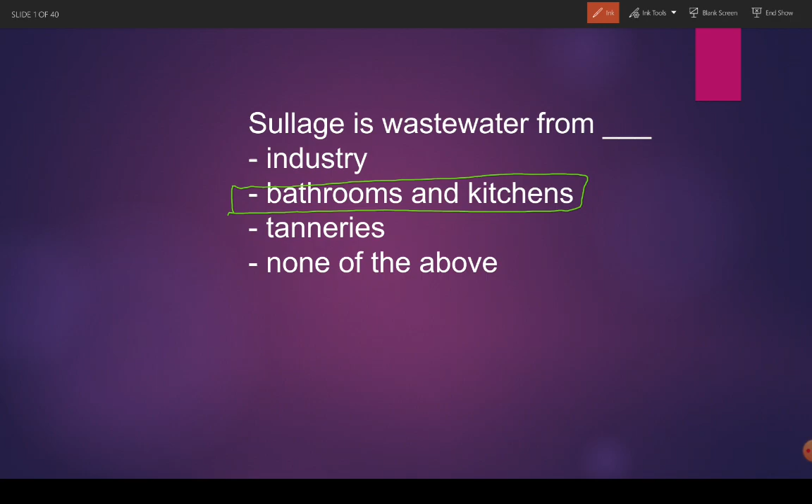Whenever we are referring to the specific word sullage, we are looking at wastewater from bathroom and kitchen basin. Wastewater from bathroom and kitchen basin is called sullage. Therefore the answer for the first question is: sullage is wastewater from bathrooms and kitchen. All right, now let's go to the next question.

Fill in the blank: blank has least moisture content. Garbage, sludge, rubbish, and sewage. Here we will first eliminate the terms having maximum moisture content. Sewage has maximum moisture content, so let's erase this. Then sludge; sludge contains water or moisture content. Now we are at garbage and rubbish.

Garbage contains organic, inorganic, and putrescible waste that can undergo decomposition. But rubbish contains mostly cardboard, paper, sheets, and mostly combustible items. And mostly combustible items means their moisture content is very less. Rubbish refers to mostly combustible items, which is why it has least moisture content.

Garbage may contain vegetables and leftovers, so the moisture content of garbage is more than that of rubbish. The correct answer here is rubbish. Rubbish has least moisture content.

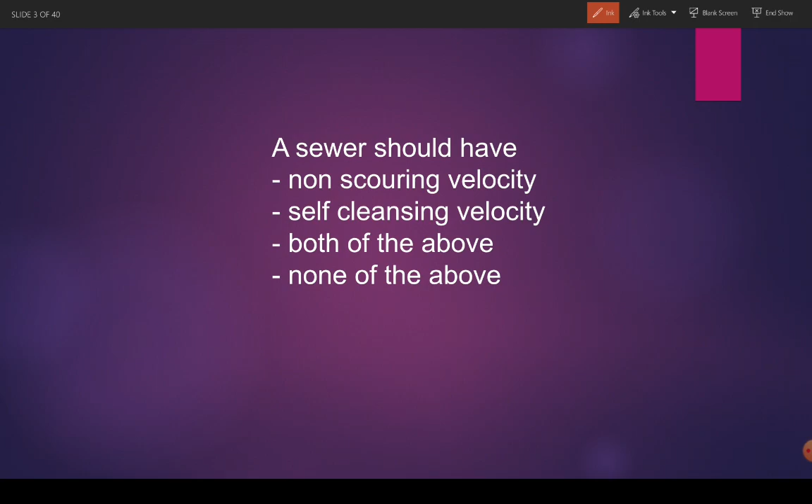Then, a sewer should have what: non-scouring velocity, self-cleansing velocity, both, or none? Whenever we talk about a sewer, it should generate a velocity that takes care of the obstacles formed by lodging of waste in it. Let's say a sewer is here, and some waste is getting deposited; then the velocity of incoming wastewater should be maintained such that all the deposited waste goes away.

This minimum velocity should be generated in the sewer, and this minimum velocity is called self-cleansing velocity. Now the velocity should not get so high that it scours or erodes the surface of the sewer. This maximum limit of velocity inside a sewer is called non-scouring velocity.

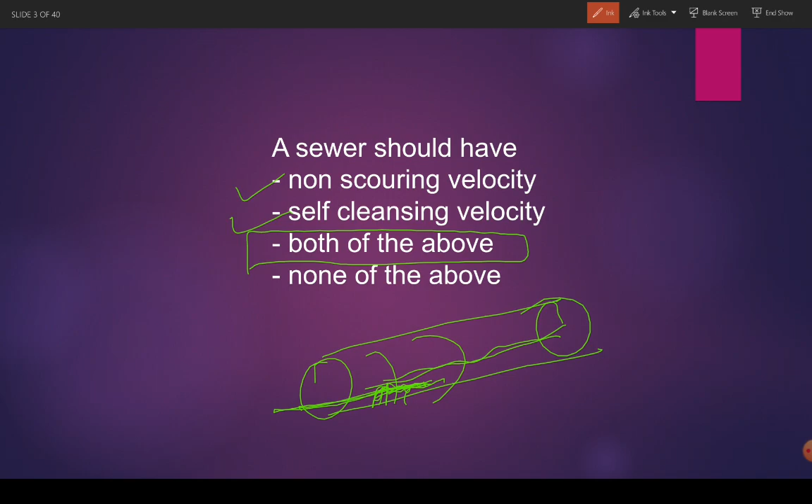Therefore the velocity inside a sewer should be such that it will not scour or cause erosion of the sewer, while also taking care of the cleansing function. That's why a sewer should have both self-cleansing velocity as well as non-scouring velocity.

Let's go to the next question: for combined system of sewerage, blank shaped sewers are best. Which shape of sewer is best suited for combined system? Egg-shaped sewers are best suited for combined system. The answer is egg shape.

Although egg-shaped sewers are difficult to construct and maintain, in a combined system of sewerage the sewer carries storm water as well as dry weather flow together. There is no separate sewer for dry weather flow and for storm water. Only one egg-shaped sewer takes care of storm water and dry weather flow, and it is very capable of generating a

self-cleansing velocity. In case of dry weather flow, the problem is that no self-cleansing velocity is generated in a large diameter sewer, but here the specific shape of this sewer makes it able to generate self-cleansing velocity. That's why for combined system of sewerage we use egg-shaped sewers. Now let's go to the next question.

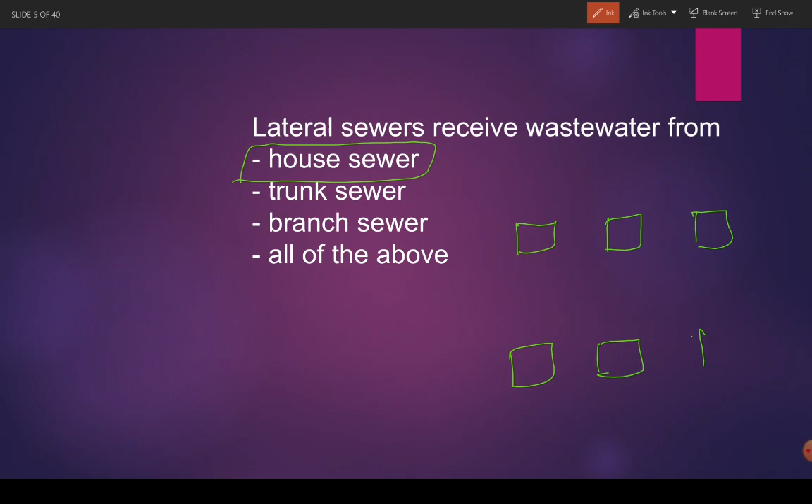Lateral sewer receives wastewater from the house sewer. For example, a number of houses are there, 1, 2, 3, and again 1, 2, 3 on two sides of the road, and this is going to be the lateral sewer.

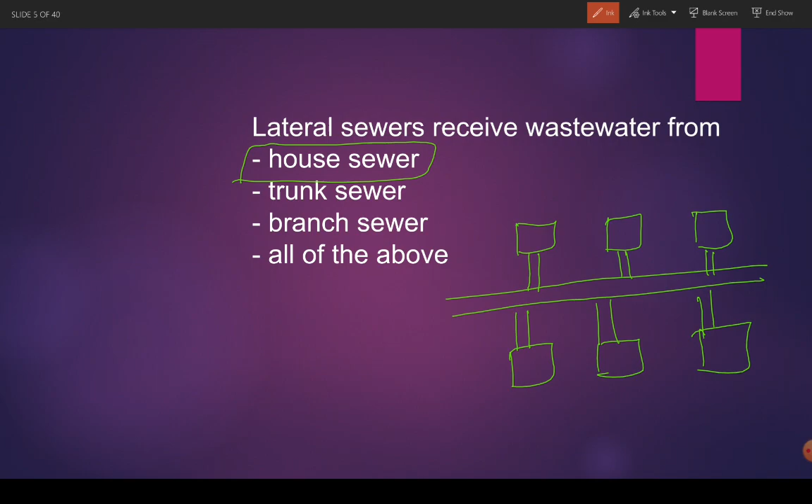Okay, and this lateral sewer receives wastewater from house sewers, from independent houses. Okay, one sewer from each house. All these house sewers dispose or discharge their wastewater into what? Lateral sewer.

Okay, let's go to the next question, which is saying: in a sewer network, blank is used that collects grit and sand from wastewater. Okay, whose function is that? Is it manhole? Is it catch pit? Is it clean out or fall? See, a manhole is there when we want to change the direction of the sewer and for inspection, cleaning and maintenance of the sewer.

Then catch pit is there. Catch pit does what? Catch pit collects all the grit and sand from wastewater and prevents their entry into the sewer. Okay. Now what is clean out? Clean out is nothing but a flushing system that generates a cleansing velocity and then dislodges all the waste that has been collected in a sewer. Okay, fall is there in order to maintain the specified slope of the sewer. In case some abrupt level change is there, we are going to use fall.

Okay, therefore the answer is: in a sewer network, catch pit is used that collects grit and sand from wastewater. The name itself is suggestive that it collects or catches grit and sand from wastewater.

Alright, let's go to the next question, which is saying: color of fresh sewage is. See, when we are talking about the color of fresh sewage, mostly it is grayish. Okay, and when we say the color will be dark brown or black or, let's say, chocolatey, these kinds of coloration will be there when the sewage gets stale. With passage of time, the grayish color is going to convert into shades of black. But remember, color of fresh sewage is grayish.

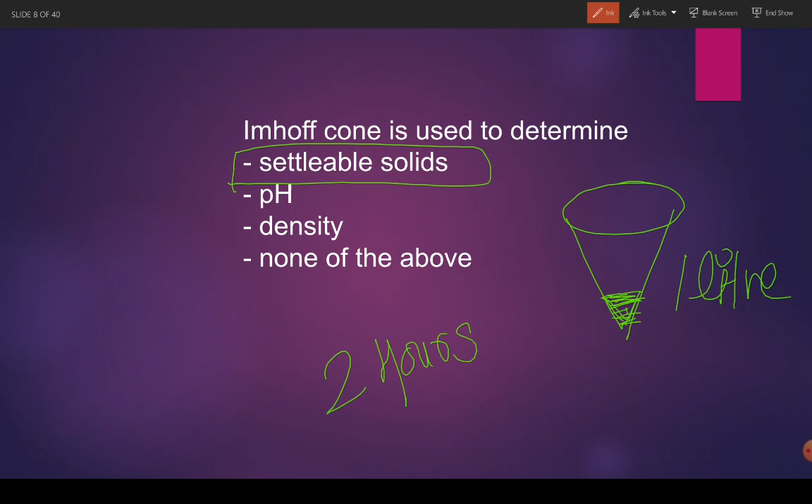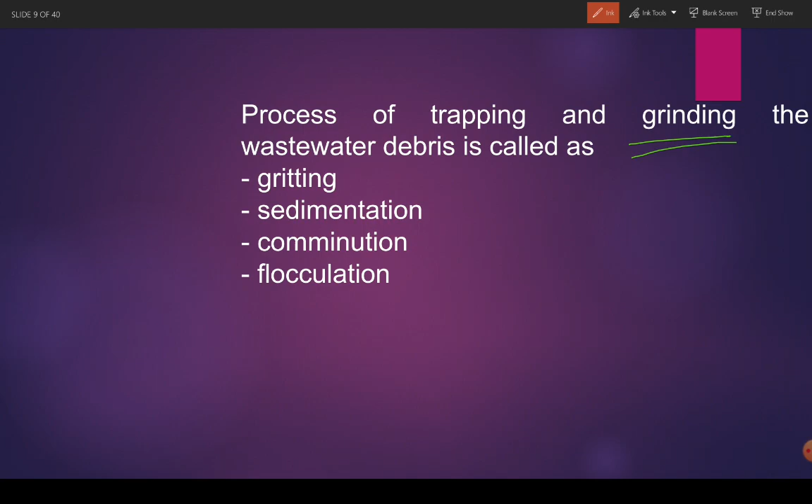What the comminution process is all about: it traps and then shreds all the organic or inorganic matter present in the wastewater into small size particles, so that they get collected, settled or stabilized in the further units of wastewater treatment. Okay, the comminution process makes use of macerators, comminutors, and barminutors. There are three devices in the comminution process: macerator, comminutor, and barminutor. Okay, the answer here is comminution.

Then, which of the following processes is an additive process in wastewater treatment? See, there are two kinds of processes in wastewater treatment. Either it is additive or it is subtractive. Whenever we talk about biological process, a biological process is a subtractive process, because whatever organics are involved in wastewater treatment, they are split and converted into simpler constituents which we can get rid of easily. This is done in biological processes only.

And when we are saying that a process is additive, the process is chemical process. Okay, because in order to make the wastewater content settle down, or in order to stabilize the wastewater content, whatever content we want to get rid of, we have to add a chemical that either results into some added mineral or some added compound into the wastewater, or some precipitate is generated that we need to take care of later.

Therefore, when we are talking about biological process, the biological process is taking away some content from the wastewater, and when we are talking about chemical process, the process is adding some new compound, some new component into that wastewater. Okay, that's why when we are saying a process is additive, we have to look at which process? Chemical process. Okay, because we are adding chemical for the treatment purpose.

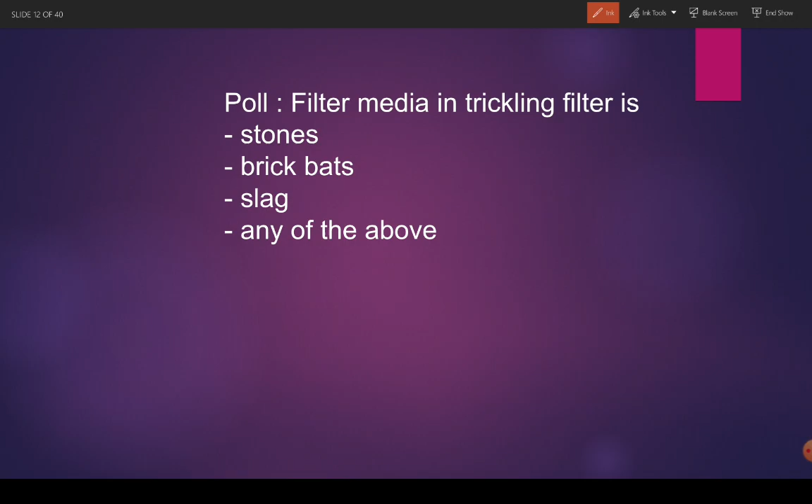Okay, then filter media in trickling filter is... okay, the word is wrong here. The question is, filter media in trickling filter is, it can be stone, yes. Can it be brick bats? Yes. Can it be slag? Yes. See, we need to have a stable, solid, hard and porous media when we are aiming to place it in any trickling filter. That's why the answer will be any of the above.

Okay, then activated sludge process is nothing but a large aeration tank, sedimentation or screening tank. See, activated sludge process means we are going to put activated culture of microorganisms in a tank where we will be receiving wastewater from primary settling tank. It will be thoroughly getting mixed up with the active microbial culture, and for the sustenance, maintenance and nourishment of the bacteria inside that tank, we will be providing them oxygen.

Okay, and oxygen provision is nothing but aeration. Here the microbes will be receiving food from the wastewater. Whatever the organic content is there, the microorganisms will be thriving on that organic content, and for their sustenance, for their existence, we will be providing oxygen via aeration process. That's why we can easily say that activated sludge process is nothing but a large aeration tank.

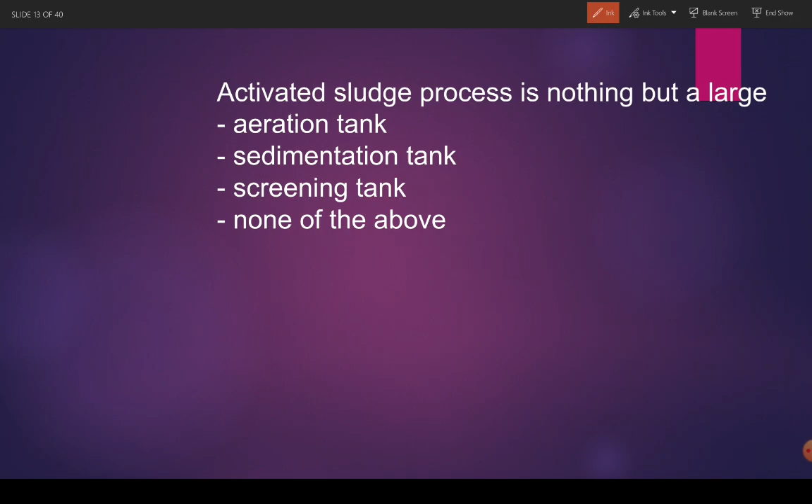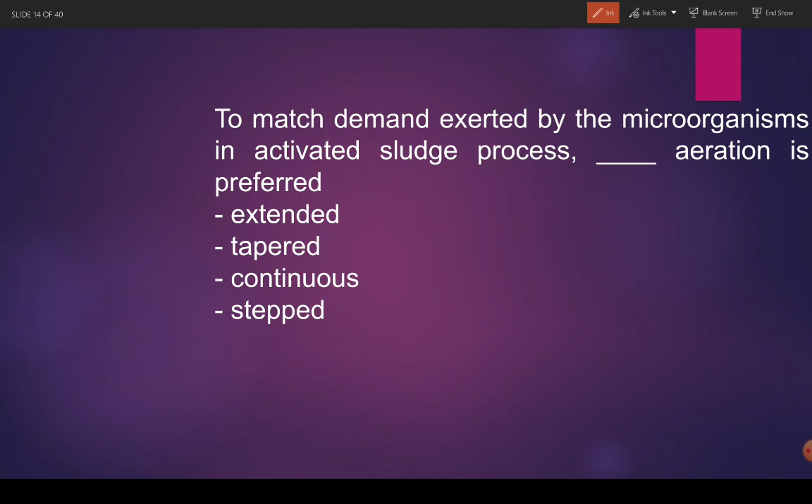Okay, then: to match demand exerted by microorganisms in ASP or activated sludge process, blank aeration is preferred. When we have to match the demand exerted by microorganisms in the activated sludge process tank, what will we be doing? Let's say this is the activated sludge process. We are receiving wastewater from PST, we are sending it to SST, some part is recycled. That's another part. Right now we are going to discuss how to match the microorganism demand.

Let's say the total tank is divided into 3 zones. We are dividing the length of the activated sludge tank into 3 zones. Now we are going to receive the wastewater here. Here microorganisms will be maximum active. Let's say these are the number of microorganisms we are seeing. Then as we move along the length, the number of microorganisms will be less because most of the food will be consumed in this zone.

Then the least number of microorganisms will be here, because food is getting exhausted as we travel along the length. Less food, less microorganisms, less will be the stress on the aeration unit for provision of oxygen. Therefore, let's say this is the base level of oxygen. If this is the oxygen level required in zone number 1, then this will be the oxygen required in zone number 2, then this will be the oxygen level required in zone number 3.

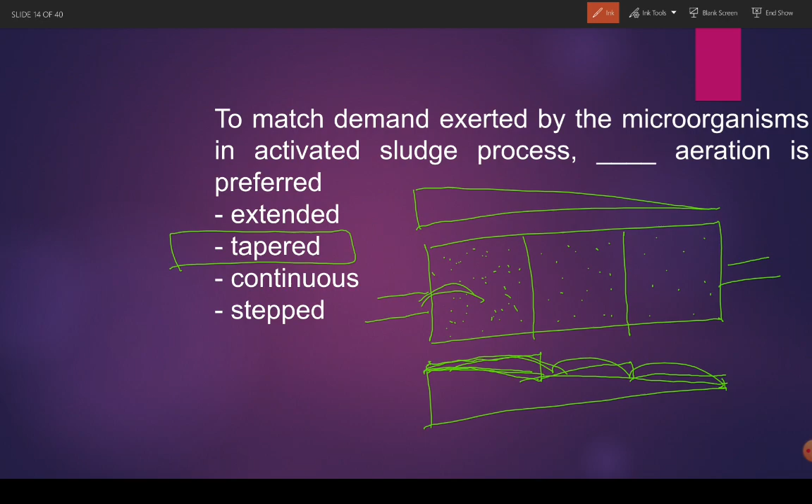Therefore, the oxygen level is continuously or gradually decreasing, and this continuous decrease over the zone is called tapered aeration. We are going to proportion the demand and supply. Therefore we will be decreasing the oxygen supply with respect to the zone, with respect to length. We will be reducing or tapering the oxygen supply or air supply. That's why tapered aeration is preferred.

Then, bacterial algal symbiotic relationship exists in ASP, trickling filter, RBC, or oxidation pond or facultative pond. See, when we are talking about facultative pond or oxidation pond, there exists a bacterial algal symbiotic relationship. Let's see how it exists. For example, this is the oxidation pond or facultative pond we are talking about. Now, it is open to sun.

Now the algae will be thriving inside the oxidation pond, and algae will be giving out oxygen, O2, and this oxygen is consumed by the bacteria. Let's say this is bacteria, they are looking cute but they aren't. Now what bacteria is providing to the algae in return: whatever complex organic constituents are present inside the sewage or wastewater are split by bacteria for their consumption, and these split constituents are consumed by the algae for their growth.

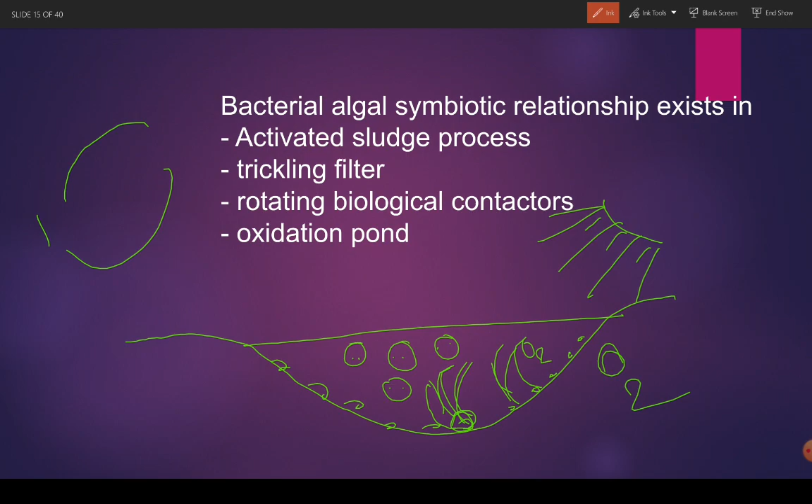Now see, here is the cycle. This is bacteria and this is algae. Algae is giving out oxygen. Bacteria are splitting the food and converting it into simpler constituents which can be consumed by the algae for their sustenance and growth, and in return algae is giving oxygen. Therefore there is a cycle of dependency, a symbiotic relationship between the bacteria and algae.

Just like the movie Venom, Eddie Brock was dependent on the venom for his power, and in return Eddie Brock, the character, was giving him space to live. That was also a symbiotic relationship shown in the Marvel movie Venom. Same here, bacteria and algae have their symbiotic relationship.

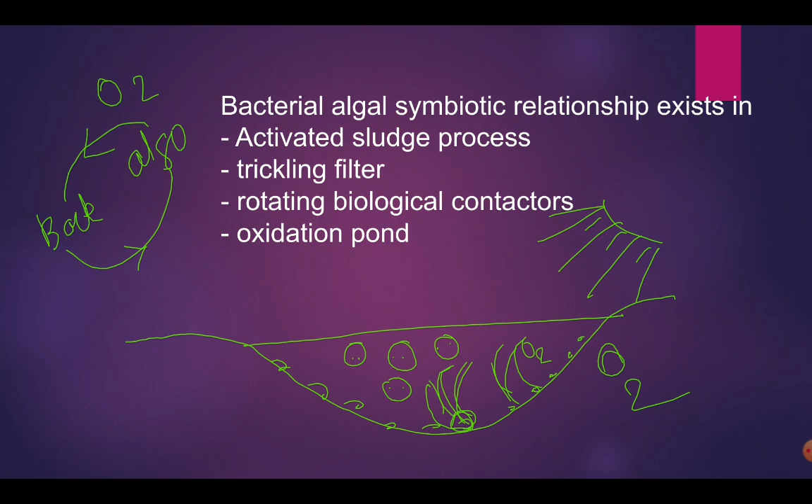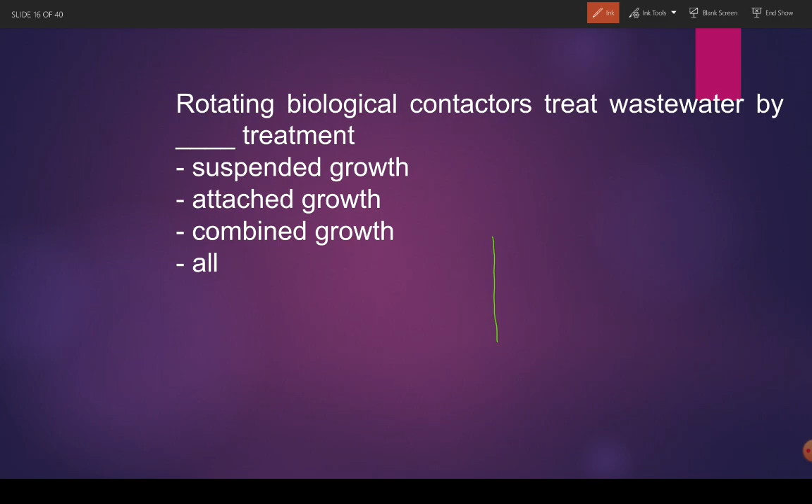Then, rotating biological contactors treat wastewater by blank treatment. Is it suspended? Is it attached? Is it combined or all? See, RBC or rotating biological contactors look something like this. This is a tank and there are several discs fitted over a rod or shaft, and these discs rotate at a very low RPM, let's say 1 to 3 RPM, inside the wastewater, and 40% submergence is provided.

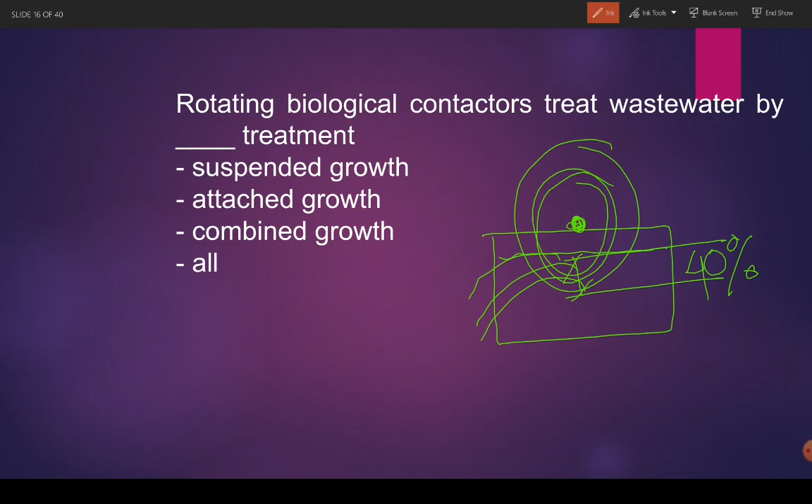This submergence is how much? 40%. Now whatever organic material there is adheres itself on the rotating disc. Along with the organic matter, bacteria will also thrive on it, and as food and bacteria thrive on the disc, it creates a biofilm. This kind of growth on the disc of RBC is attached growth, because the organics and microorganisms are attaching themselves on the surface of the disc. That's why RBC treats wastewater by attached growth process.

Let's go to the next question. Acid fermentation and methane fermentation processes take place in aerobic digester, anaerobic, facultative, or none. First stage is acid fermentation, second stage is methane fermentation. These two processes take place in the anaerobic digester. Methane is generated in the anaerobic digester.

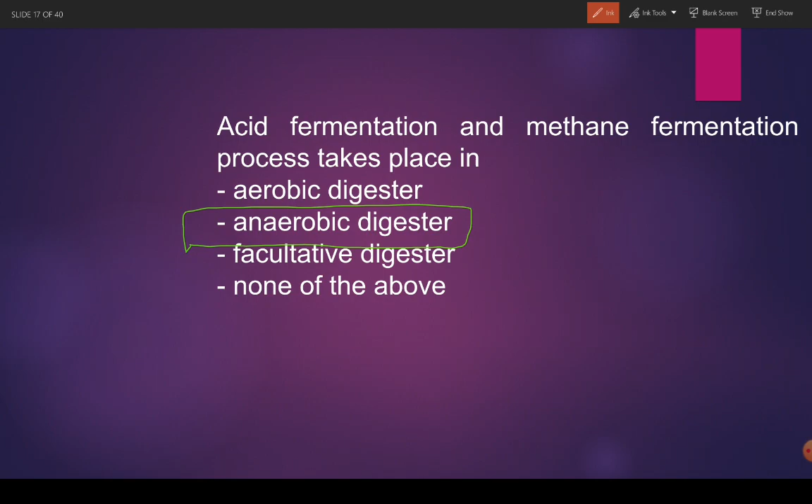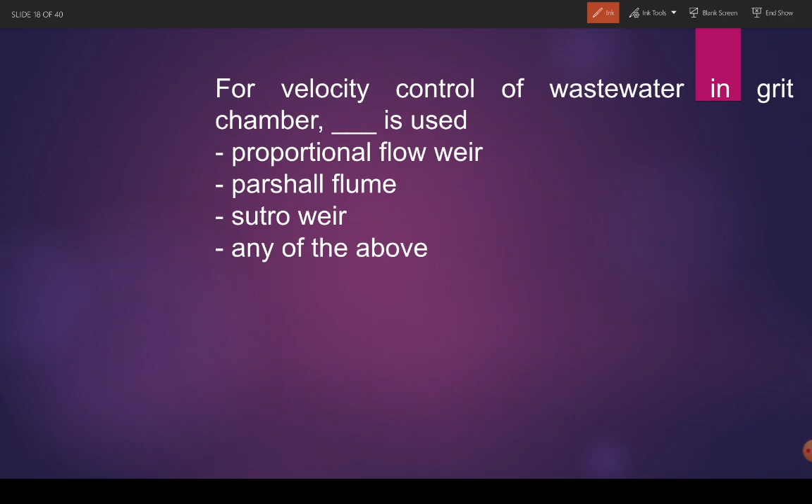Then for velocity control of wastewater in grit chamber, what are we going to use? We can use proportional flow weir, we can use Parshall flume, we can use Sutro weir, so we can use anything mentioned in the options. That's why the correct answer should be all of the above. We can use any of the three devices for velocity control of wastewater in the grit chamber.

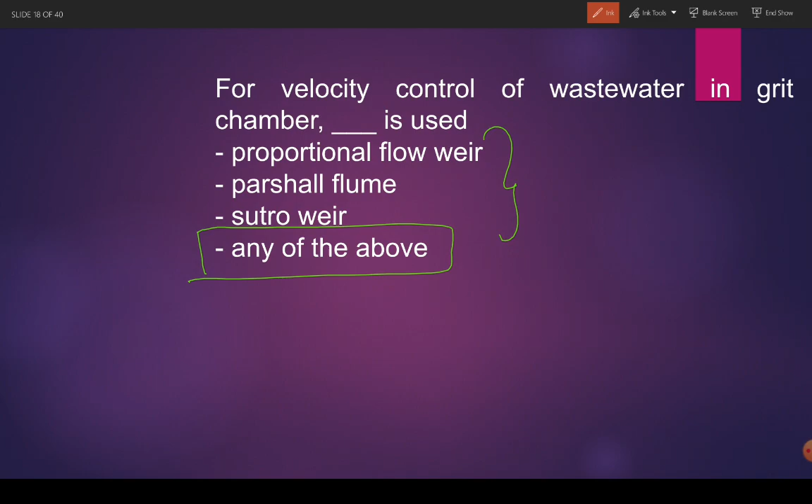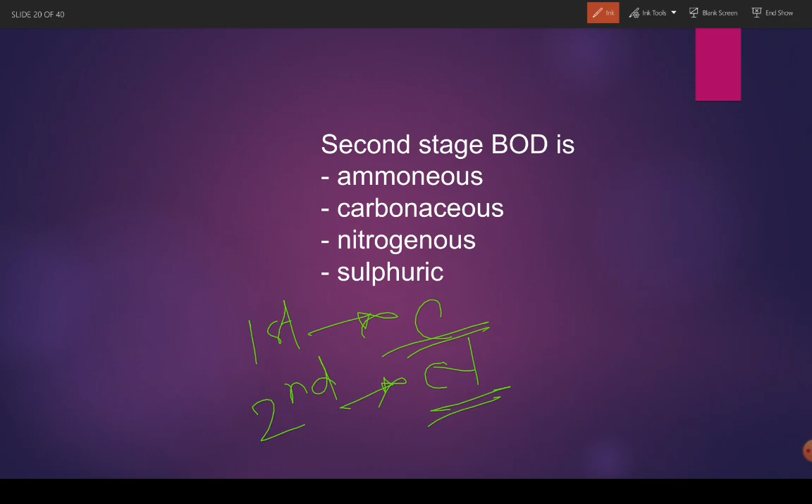Then, second stage BOD: is it ammonious, carbonaceous, nitrogenous or sulfuric? See, first stage BOD is always carbonaceous, and when we are saying second stage, it is nitrogenous. First is C, second is N, carbonaceous and nitrogenous. Nitrogenous is the answer.

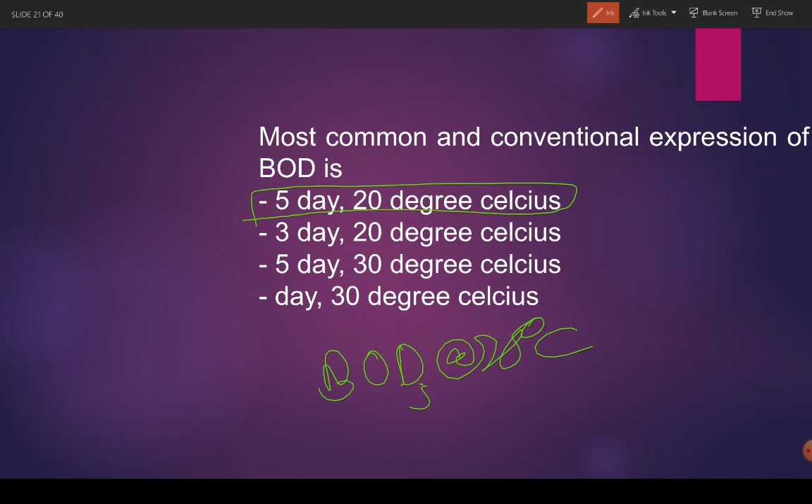Then, the most common and conventional expression of biochemical oxygen demand. Biochemical oxygen demand is generally, conventionally expressed as 5-day 20 degrees Celsius. It is written as BOD 5 at 20 degrees Celsius. The period is 5 days and the temperature of maintenance is 20 degrees Celsius.

Which method of settling uses natural forces only? See, when the two words settling and natural force are there, it means that we are looking at a tank that solely uses gravity force, not for clarification exactly, but for the purpose of settlement, for the purpose of sedimentation.

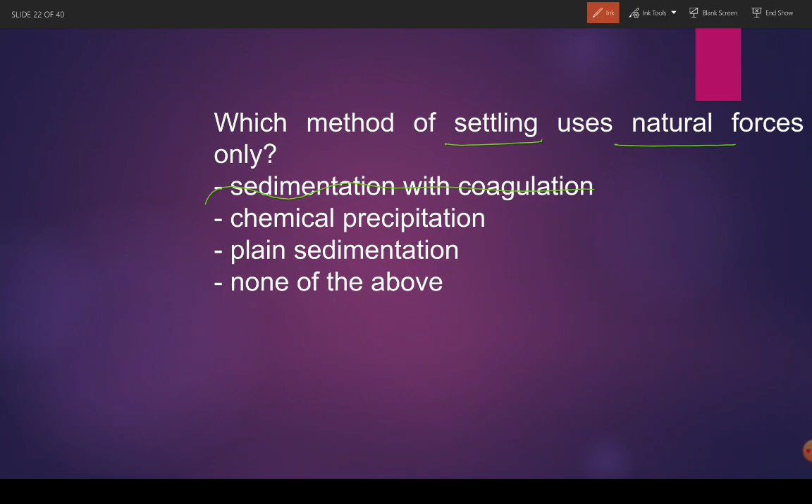That's why the answer will be, is it with coagulation? No. Is it chemical precipitation? No. We are talking about plain sedimentation here. Plain sedimentation is the one that totally relies on the force of gravity for causing the sedimentation.

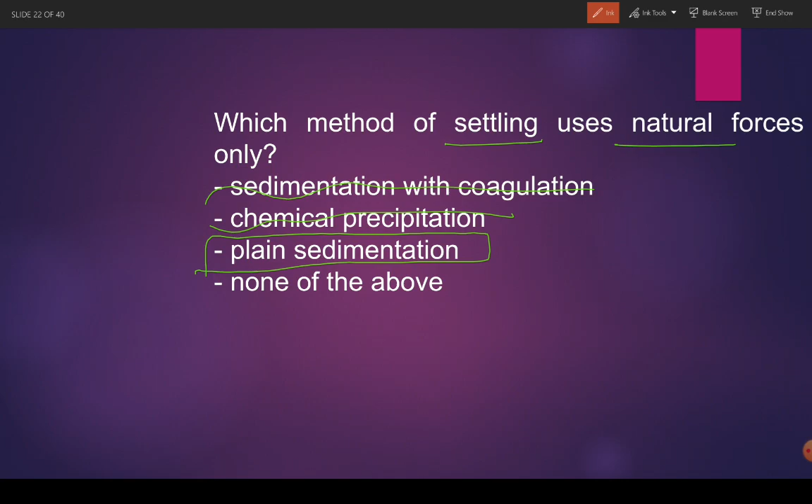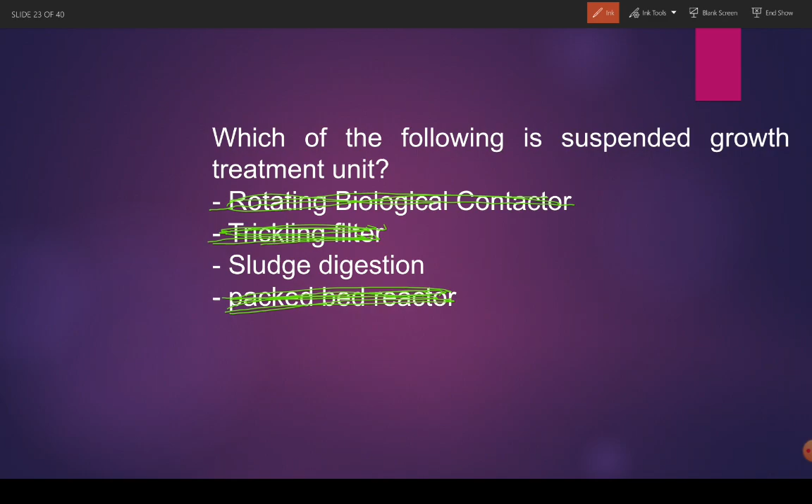Then packed bed reactor, no. Also in packed bed reactor, the media helps the biofilm to grow and cause the stabilization of the organic matter. Now sludge digestion is a suspended growth treatment unit. In sludge digestion, we are not providing any media, stone or surface on which biofilm growth takes place or bacterial culture settles. There is no surface. The total volume of the tank is used for cultivation of bacteria and the stabilization of organic matter.

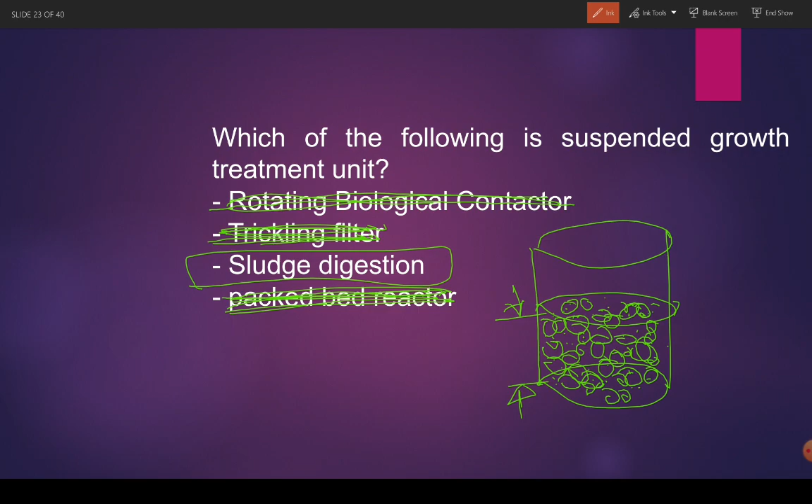Let's say this is the sludge digester. In this volume of wastewater there is no surface for growth of bacteria. Inside the volume only bacteria are thriving, and they are thriving on the organic matter present in the wastewater or the sludge. Same way in sludge digestion, the sludge is getting digested, undergoing the chemical reaction inside the volume only. There is no surface or media present in sludge digestion.

This is the concept of suspended growth. Suspended growth means a tank whose volume will be utilized by the bacteria for thriving, or by the chemical reaction in order to stabilize the wastewater, or sludge in this case. In attached growth, some surface or media will be there, over which bacterial biofilm will be growing.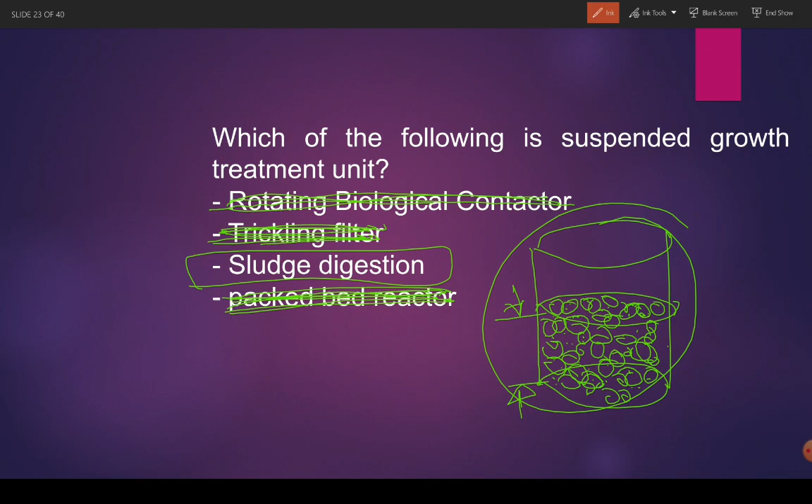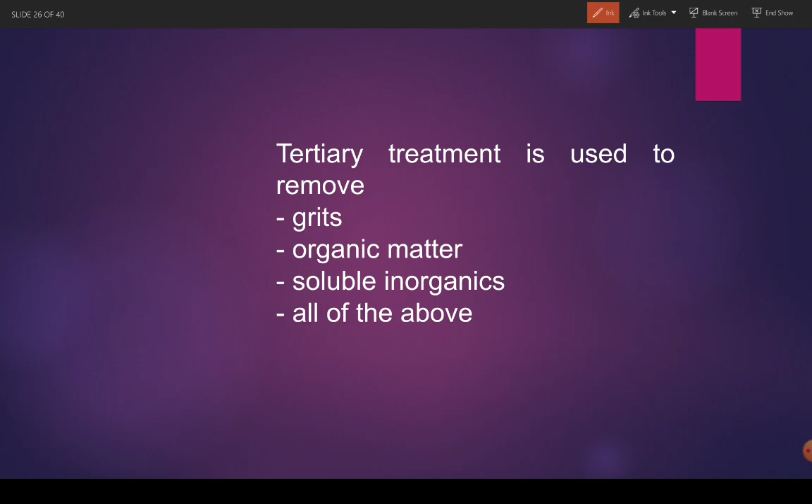tertiary treatment is used to... Why are we going to use tertiary treatment? We use tertiary treatment in order to get rid of soluble inorganics, not insoluble organics, soluble inorganics, such as phosphorus or nitrogen. Okay, in order to get rid of soluble inorganics, we use tertiary treatment. It consists of activated carbon treatment. Okay, it is expensive and it is rarely used.

We often stop after secondary treatment. Okay, we provide disinfection at the final stage of wastewater, and we treat the sludge by sludge digestion. Tertiary treatment is rarely used because it is not only expensive but also difficult to operate and maintain. Okay, then

fill in the blank: ___ is not a chemical treatment unit process. Is it flocculation, or is it disinfection? Is it gas transfer or adsorption? See, when we are talking about a chemical treatment unit process, we are talking about adding a chemical or a compound to the wastewater. Here, in the process of disinfection, we are going to add chlorine, or chlorine gas.

Gas transfer also means addition or subtraction of a gas, so we are dealing with a chemical level of treatment. Adsorption is also a chemical phenomenon. Only flocculation is here, which is not a chemical process. Okay, flocculation is not a chemical unit process. Alright, then

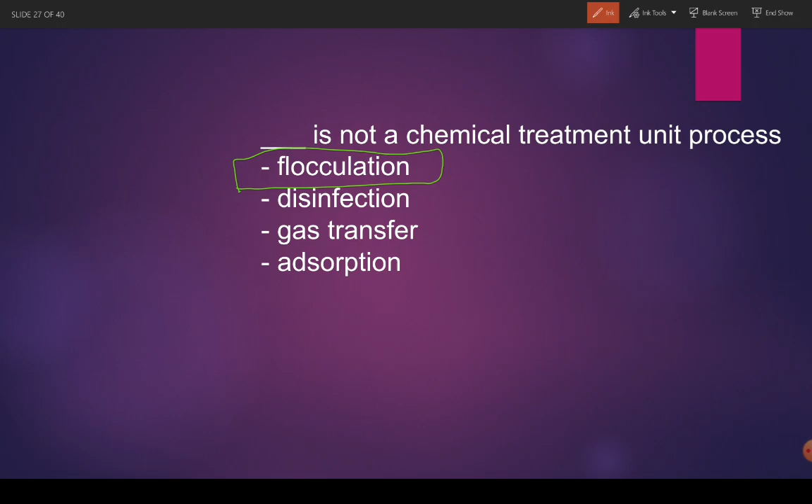for screening units, velocity of ___ is satisfactory. See, experimentally it has been observed that a velocity ranging from 0.6 to 1.2 meters per second is a very optimized range of velocity in screening units. Okay, the range is 0.6 to 1.2 meters per second.

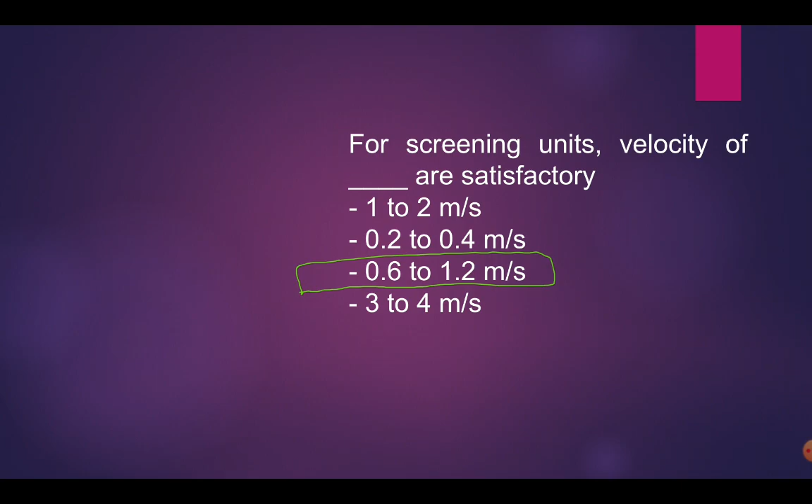Then, the advantage of HRTF, that is high rate trickling filter, over conventional trickling filter is... There may be one or there may be many. Less cost of operation: yes, we have more volume recycled, that's why operation cost gets reduced. We don't have to rely on one large trickling filter; we can have a small trickling filter and recycle the wastewater. Less volume requirement: obviously, the conventional trickling filter is massive in size compared to the high rate trickling filter.

Then less fly nuisance. Since we are recycling the wastewater, there is no stagnancy of wastewater, and that will lead to less formation of sewage flies, so we will have less fly nuisance. That's why the answer is all of the above.

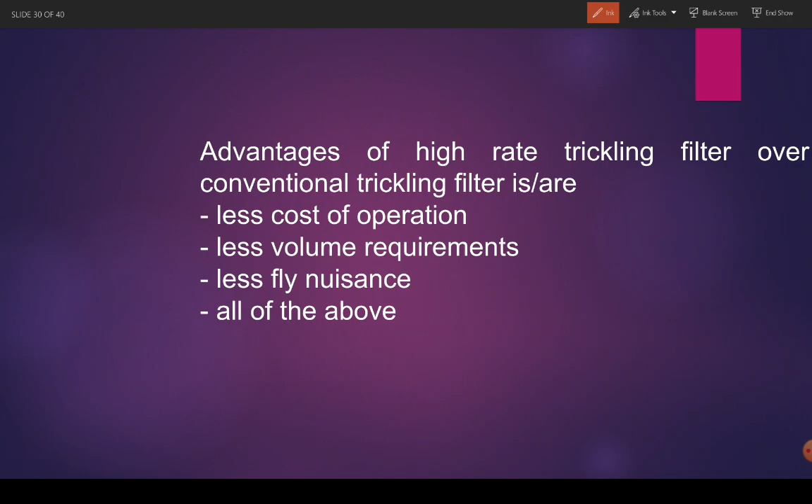Okay, then in sewage treatment, gas transfer is used to... we just discussed this point. Gas transfer means addition of a gas in order to treat the wastewater or settle some solids, or removal of gases such as methane or some other gas in order to reduce the odor. That's why gas transfer covers both processes, adding the gas and removing the gas.

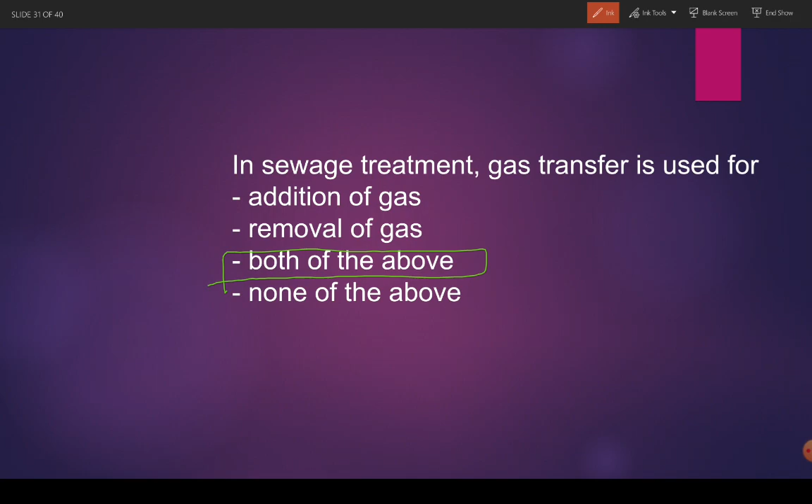Then fill in the blank: ___ is an ion transfer process in wastewater treatment. Is it adsorption? Is it chemical precipitation? Is it chemical coagulation, or all? See, all three processes mentioned here are ion transfer processes. Whether it is adsorption, chemical precipitation or chemical coagulation, all involve transfer of ions. That's why the option should be all of the above.

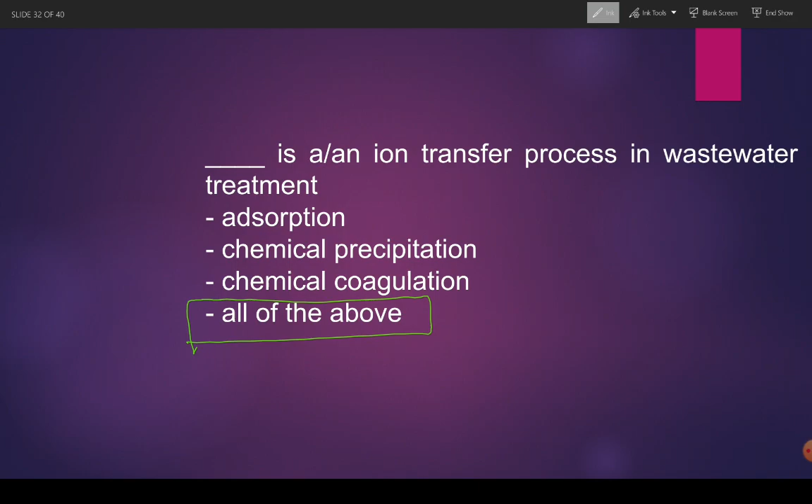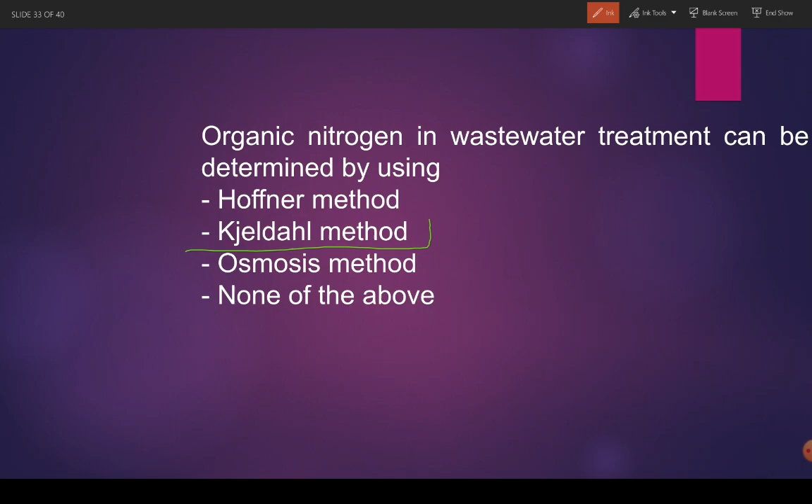Then, the temperature of wastewater is generally blank that of domestic supplies. See, when we are talking about water supply, the temperature of water supply is less as compared to wastewater, because whenever the water is being used in processes such as kitchen, industry, or some manufacturing plant, the temperature of the used water rises. That's why the temperature of wastewater will always be slightly more, even by a few degrees, let's say 2, 3, 5 degrees, than domestic water supplies. Okay, the answer here is more than.

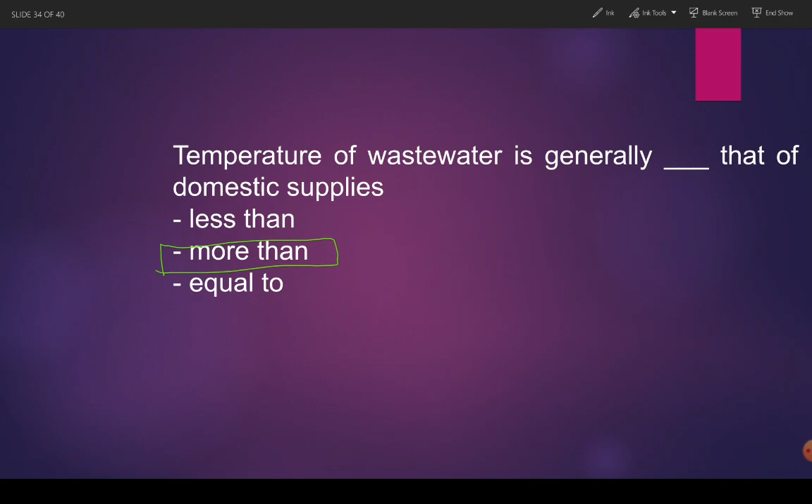All right, then, putrefaction is a term used for... see, when we are talking about anaerobic decomposition, we say the matter is undergoing putrefaction. Anaerobic decomposition means decomposition of organic material in absence of bacteria that utilize oxygen. Alright.

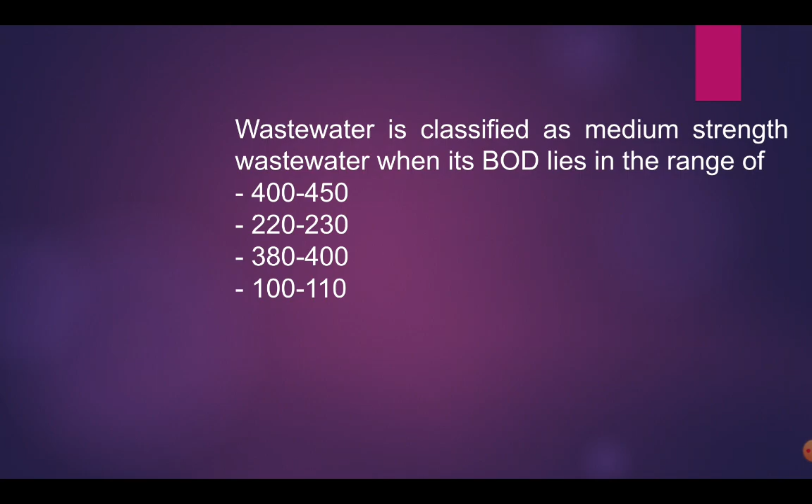Then, wastewater is classified as medium strength wastewater when its BOD lies in the range of... see, when the BOD lies in the range of 220 to 230, the wastewater is referred to as having medium strength. When the range goes way beyond 400 and 450, it is called high strength wastewater. The strength of wastewater is determined with reference to BOD, biochemical oxygen demand.

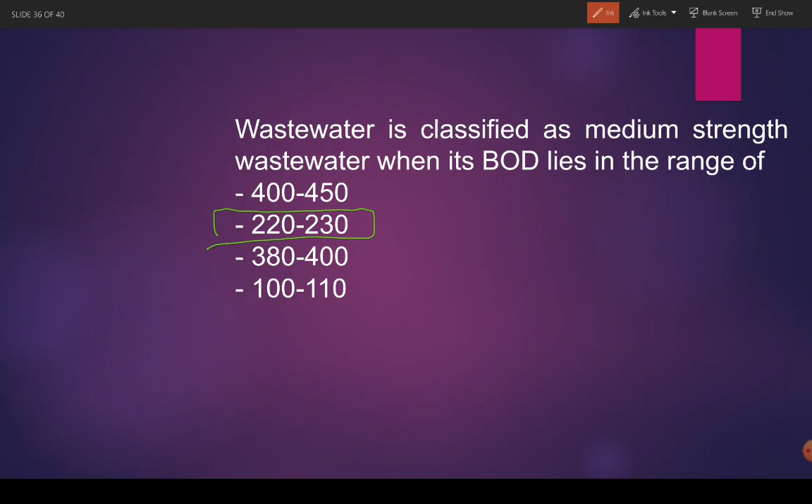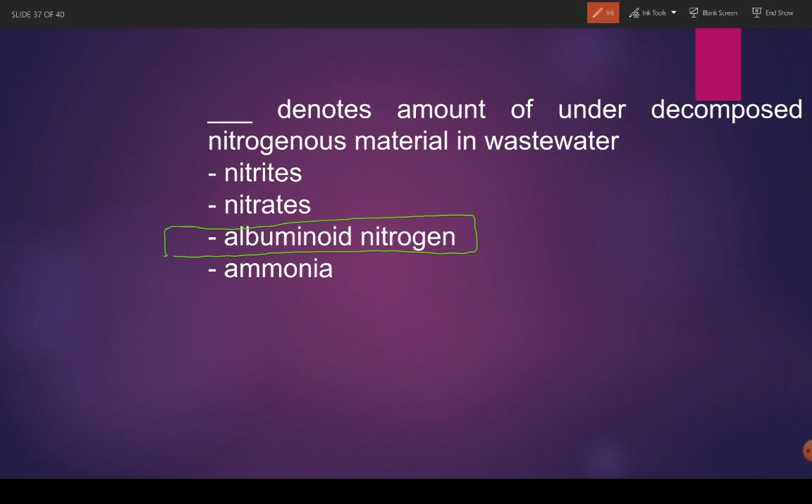Then, blank denotes the amount of undecomposed nitrogenous material in wastewater. Is it nitrites, nitrates, albuminoid nitrogen or ammonia? When we are talking about undecomposed or partially decomposed nitrogenous material, we look at the presence of albuminoid nitrogen. The more albuminoid nitrogen we find in a wastewater sample, the more undecomposed nitrogenous material is inside the sample.

Then, when the dilution factor is blank, wastewater can be directly discharged into a river stream. When the dilution factor is more than 500, we can directly let the wastewater go into the river stream. If the range is below 300 or below 150, we have to increase the level of treatment. If it is above 300, then pre-treatment and some primary treatment units are used, then the wastewater can be discharged. If it is between 150 and 300, then preliminary treatment, primary treatment and some sort of chemical treatment should be given. And if it is less than 150, we have to extensively treat the wastewater first, and only then can we discharge it into the river stream.

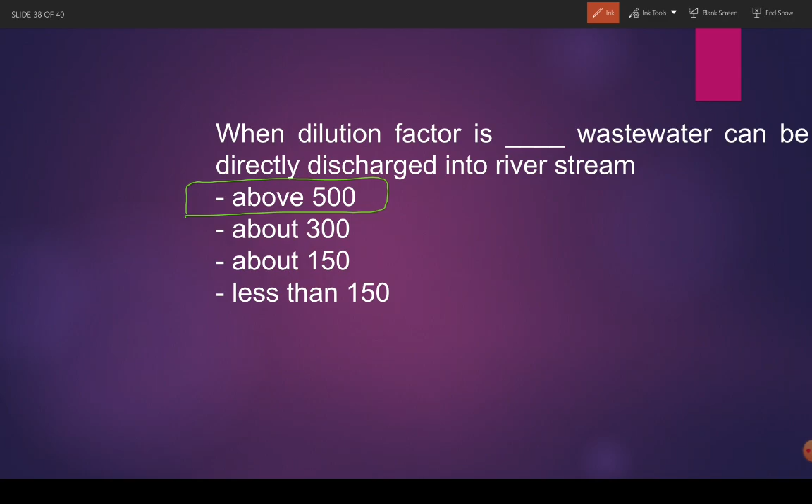Then, final disposal of sludge is done by... what can we do to get rid of the sludge? Can we use it in sanitary landfill? Yes. Land application? Yes, we can just spread it over land. And manure making? Yes. If the nutrient value of the sludge is high, we can make fertilizer or manure, and it can be used in agricultural applications. Therefore all of the above is the right answer.

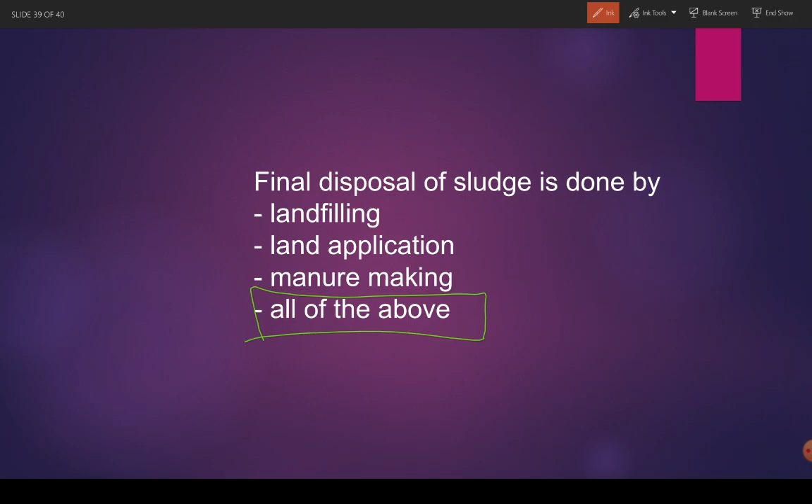Then, how many settling zones are there in the sedimentation process? There are 4 settling zones: discrete settling, flocculant settling, hindered or zone settling, and compression settling. So there are 4 settling zones in the sedimentation process. The answer here should be 4.

Therefore, this was the solution for the quiz we had for wastewater engineering on our Telegram group.